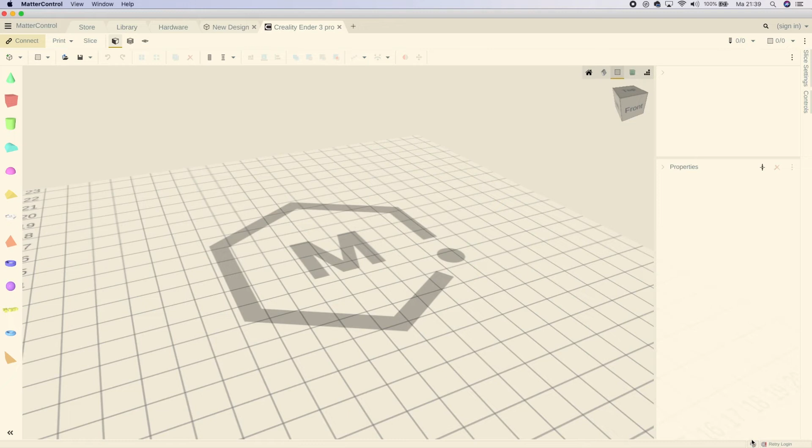Like I mentioned in the intro, today we are going to take a look at a different kind of slicing software. Maybe you're familiar with Cura and also Prusa Slicer or Slic3r itself or Simplify3D. There are many different kinds of slicing software, but the one I'm going to talk about today is MatterControl from Matterhackers. It's a slicing software that can do both. You can use it for slicing just like Cura or Prusa Slicer or other slicing software, but on the other hand you can also use it to design your own things, like in TinkerCAD.

I'm not going to compare it with Fusion 360 or other 3D CAD software, but I think for the basic principles you can make some awesome designs. So let's continue with the software part.

You can find the download link in the description of this video. If you click on it, you will get to the site matterhackers.com, and there you can download the right file for your computer. In my case, I downloaded the version for my Mac, and after the installation you will get a little tour of how everything works, the library in this case, and you can also find the print.

If you have your printer directly installed or directly attached to the software, you can directly print it. You can also have the view options here, also the tumbling cube as MatterControl will call it, and also the application menu.

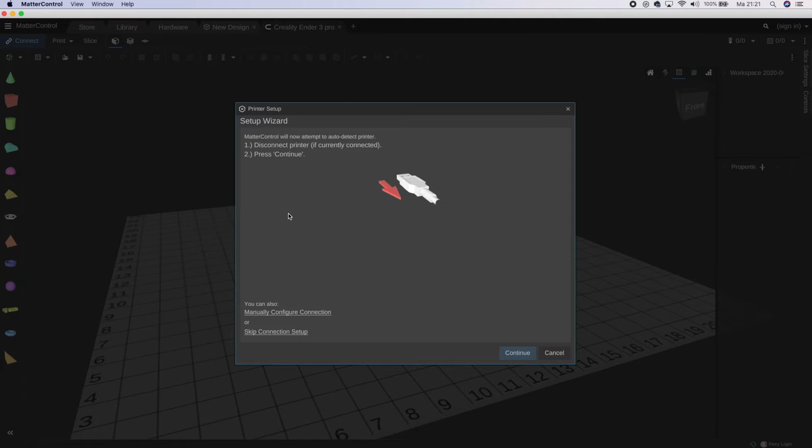The setup wizard asks you to unplug your 3D printer and then plug it in again, so that the printer can continue with the setup. In my case, I declined it because I don't find it needed in this tutorial.

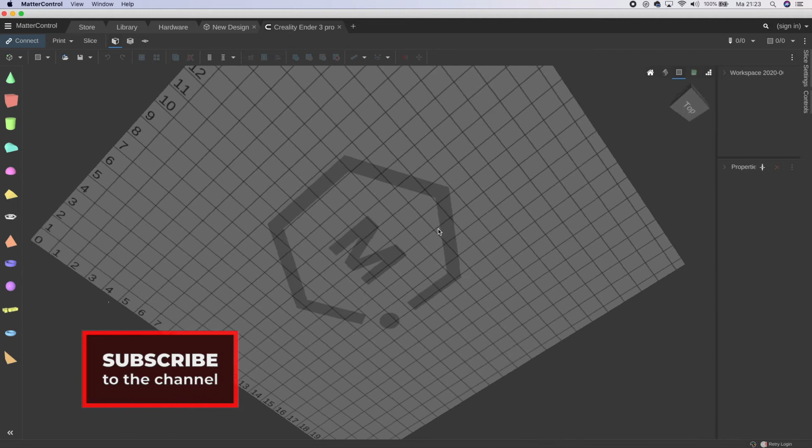With your mouse button you can move the building plate around. Of course, it can happen that it is going to turn more and more, and after a while you want to reset it. Click on the house button for home position, and there you have it. You can also use the top, but you better use the home button function.

Now everything is reset and you can start using it. And as you see, my Creality Ender 3 Pro is added as a tab. You can remove it if you want.

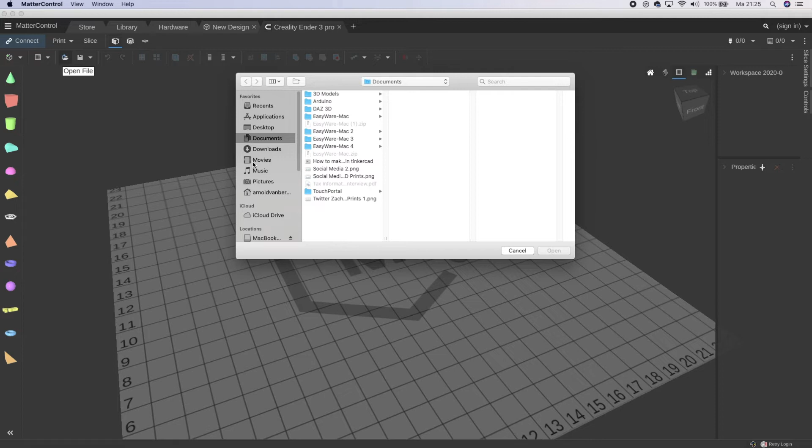But first, we are going to add a model to the building plate. We follow a normal procedure by opening the folder, then select one of your models, in this case the Benchy. I'm going to my folder with all models in it, and then I will select the file for the Benchy. And there you have it.

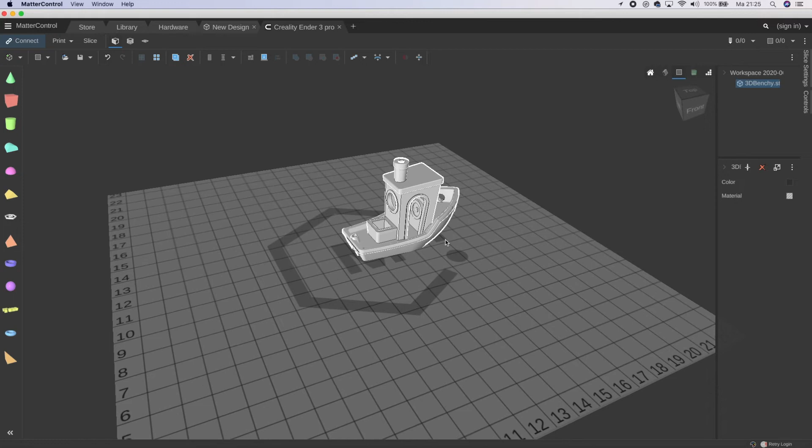It's now on the building plate. Just put it in the middle so that we know for sure that it is not off center. So now it's time to start slicing.

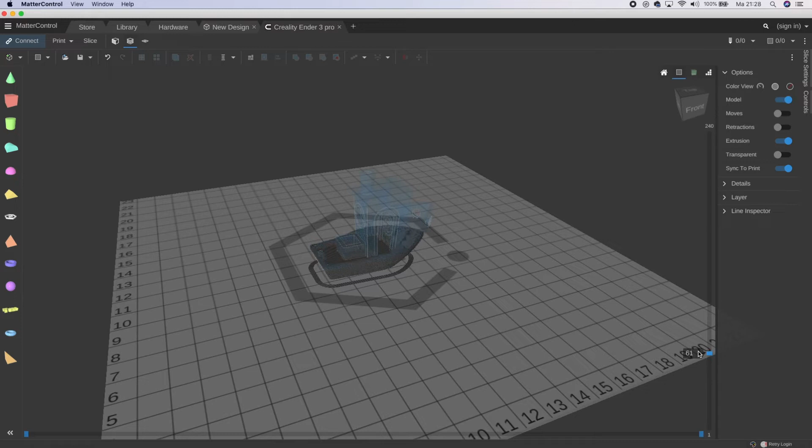After you press the slice button, you will get a little dialog screen which tells the progress of the slicing. When you didn't change anything, you will get the standard settings. And if you don't see anything, just move the slider on the right side to reveal your 3D printed model. Well, digital in this case.

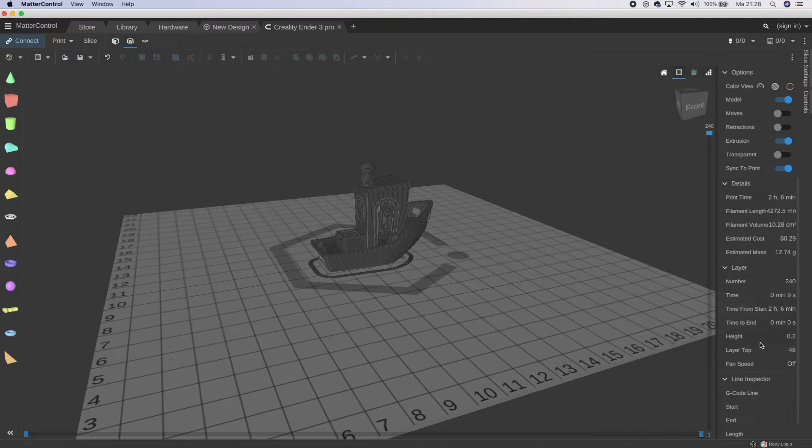So on the right side you will find a whole bunch of information in the Details tab. If you click it open, you will find everything you want to know. The printing time, the filament used, and other information you will also find in different kinds of other slicers.

On the right top corner you will find the hot end temperature, in this case 210 degrees, and next to it we have the heat bed temperature, in this case it's 60 degrees.

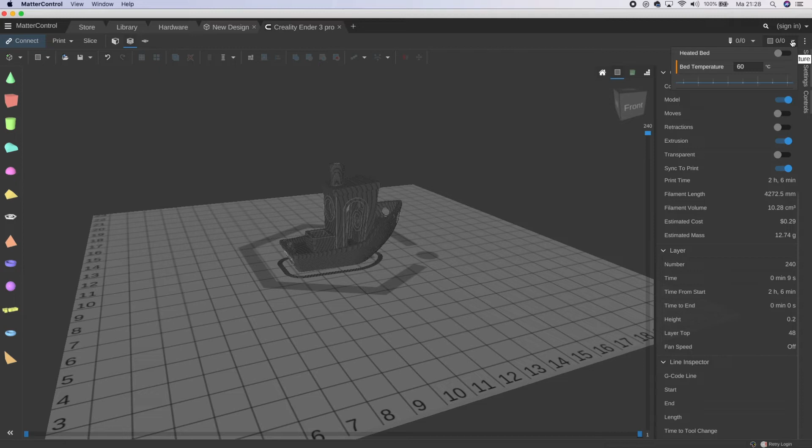In the first step you will find the slice settings. In this case I used standard, and you can change it to whichever kind of setting you want. On the right side next to it you will also find your PLA or different other kinds of filament settings.

In the tab General you find the general settings, you find layers, and you also find infill. Then we go to the Speed tab, where you find everything you need for your printing speed. You also have there a little section for cooling.

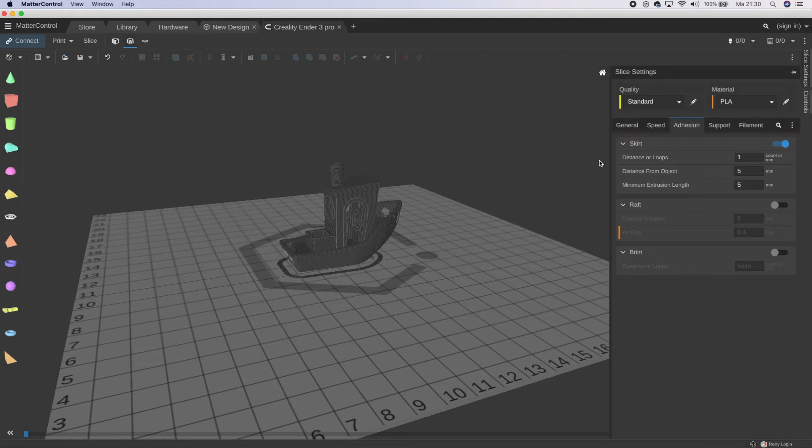Then we go to the Adhesion tab. Here you find everything from skirt, raft or brim. And then you also have some support settings, and next to it your filament settings.

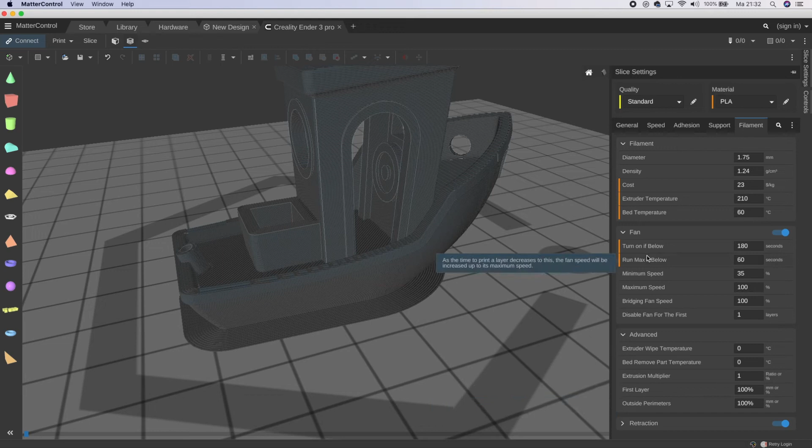Everything you want to fill in there you can change or adapt however you like. Advanced settings, and retraction, you can find in there as well. And then we have, like we mentioned earlier, the details at the end.

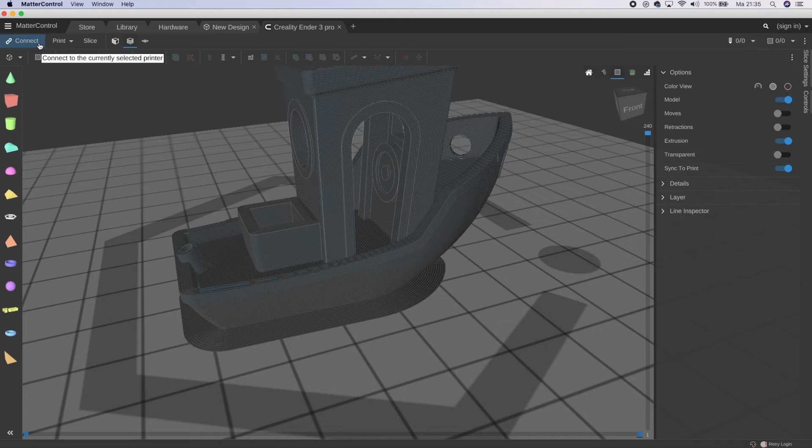When we are all done with this, we can export it. We press print. So if you didn't connect a 3D printer to your MatterControl, no problem, just press on print, export, and then change the name into whatever you like and save it on your SD card. Once that is done, you can clear the building plate and you are good to go.

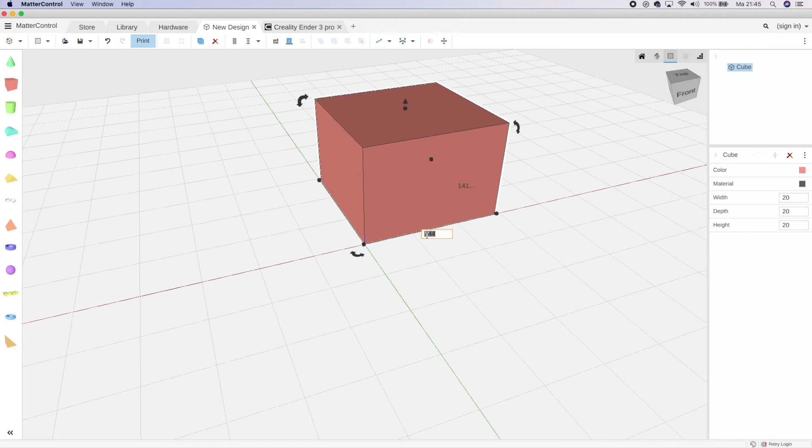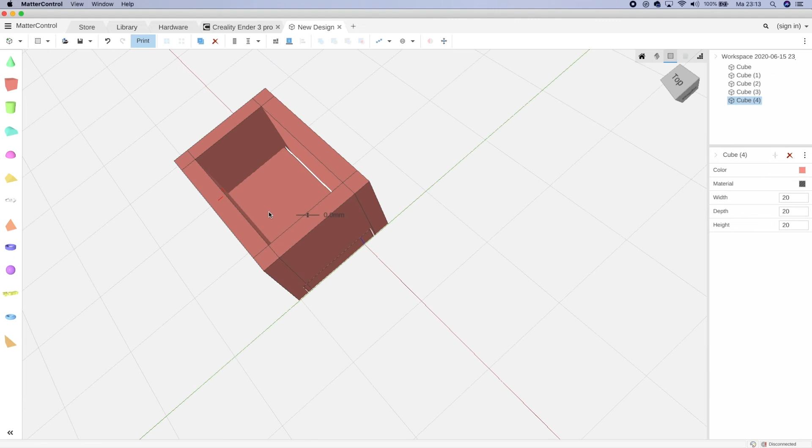So you can use MatterControl for slicing, but you can also use it for making your own designs. The designs you make are similar to TinkerCAD. You use some basic shapes like cubes, circles, rounds, balls, different kinds of forms and shapes, and those shapes you can modify to make your own design. If you are handy with TinkerCAD, then MatterControl is very easy to use as well.

I had to make a nameplate a long time ago, and I designed this nameplate within an hour or so. I started with a basic cube shape, expanded it, made it flat, and then added some letters, two different kinds of fonts, and also numbers. I designed this 3D printer all with normal cubes.

Stretch it, make it a little bit different, and then you get this 3D printer out of it. It's that simple. So, and this is the result, from my Ender 3, sliced with MatterControl.